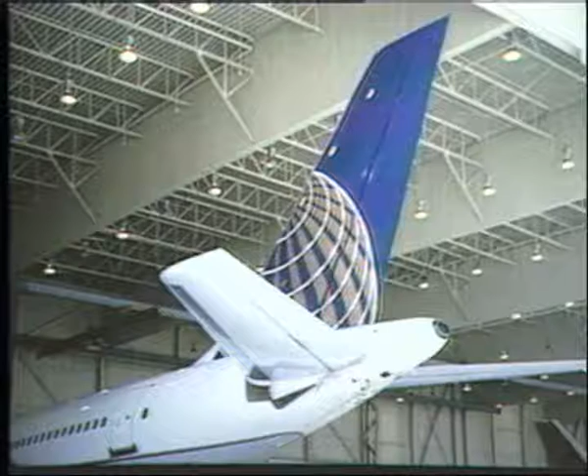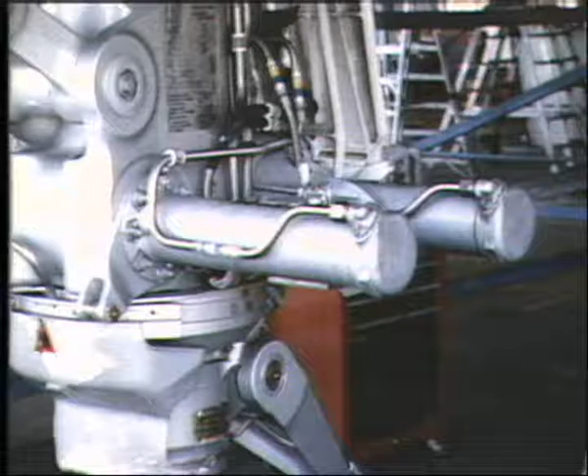When you think of hydraulic system maintenance, what's the first thing that comes to mind? Most likely it's replacing filters, servicing reservoirs, or changing components. Well, the hydraulic system's pieces and parts that need the most attention aren't components and filters. They're lines, B-nuts, O-rings, and seals.

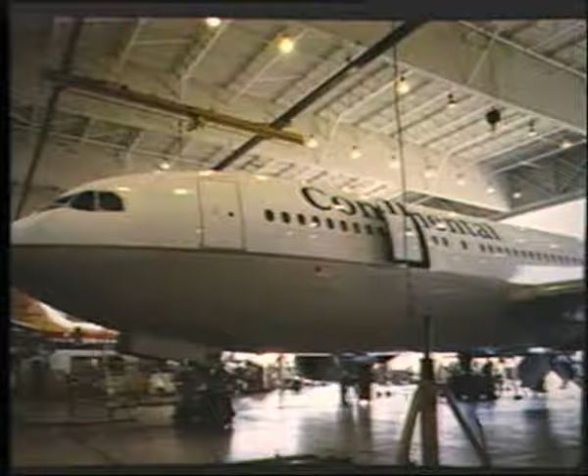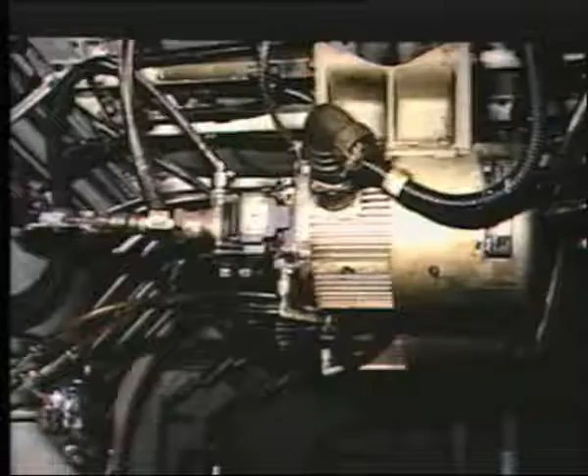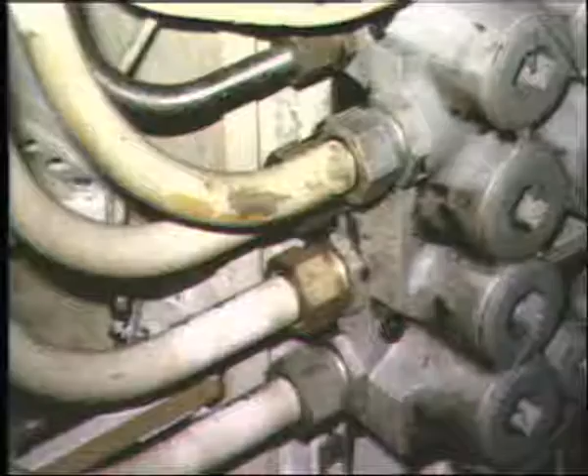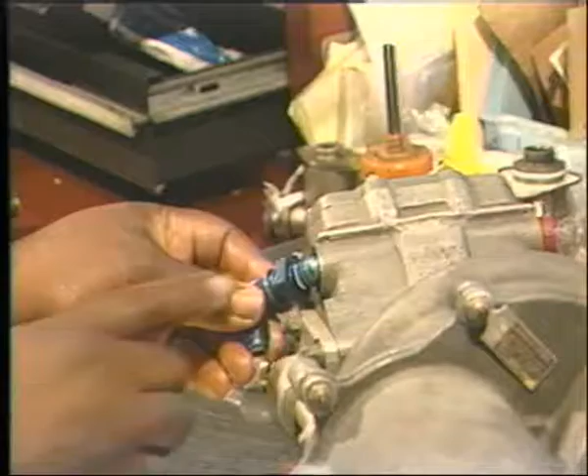The remaining 48 problems are because of leaking hydraulic tubes, B-nuts, O-ring packings, and other types of seals. That means that 48 of every 100 hydraulic system problems are caused by a simple plumbing failure. However, these problems cause the greatest number of flight delays and cancellations.

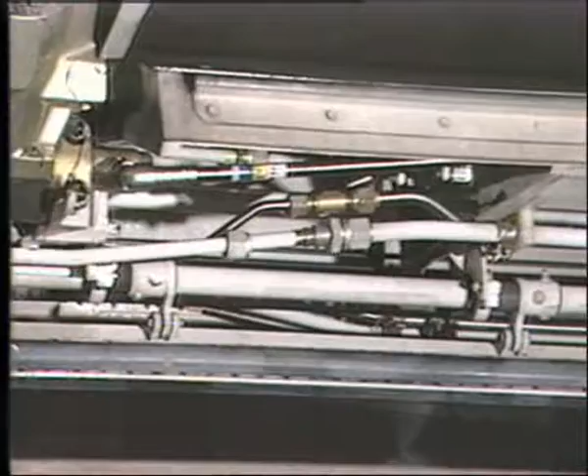These simple plumbing problems can also be real hard to fix if you don't know the basic hydraulic plumbing rules. If you don't work carefully and follow these rules, your work may be the cause of the next hydraulic leak that delays or cancels a flight. Let's look at these basic hydraulic plumbing rules.

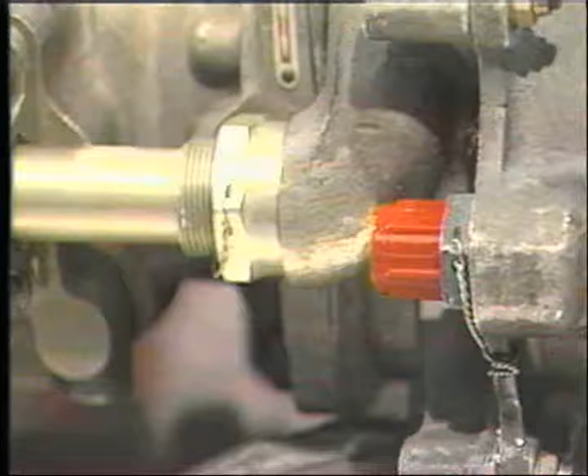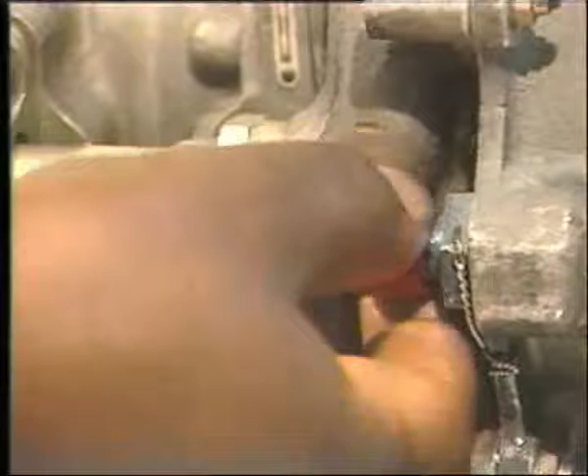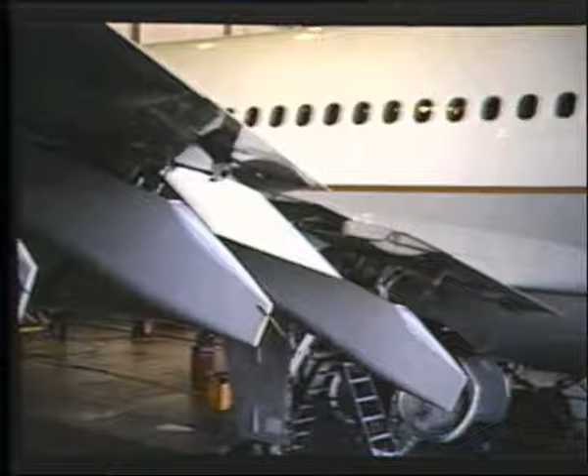Always work clean and cap open lines. Contamination that gets into a system or collects on sealing surfaces can cause leaks, internal and external. Hydraulic fluid itself is a contaminant. It can eat paint and decals. When hydraulic fluid is allowed to penetrate a composite structure, it will attack the core material and reduce it to mush. Once a composite assembly has been attacked, its structural integrity will be lost.

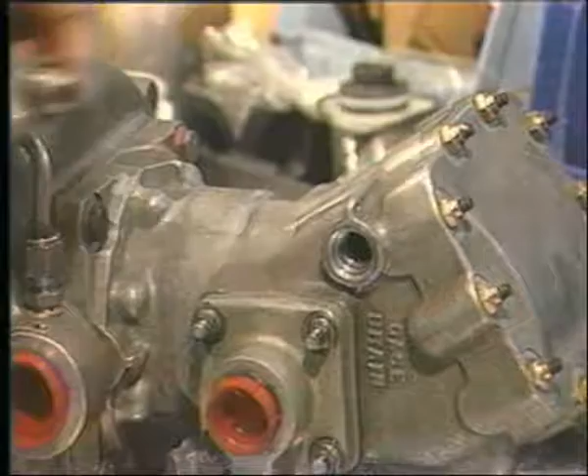To avoid damage caused by twisting, tearing, and chipping, always lubricate O-ring packings, seals, backup rings, and fitting threads with hydraulic fluid before assembly. When assembling hydraulic system fittings, be sure that seals and backup rings are properly positioned before torquing the connection.

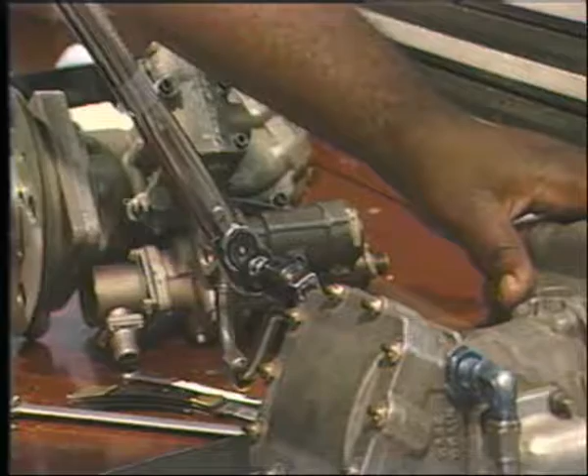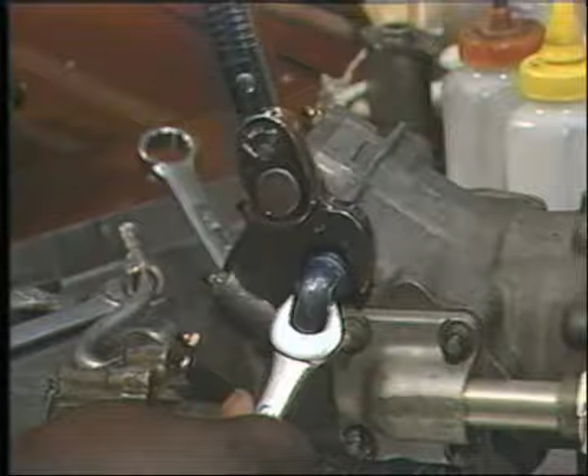When installing an elbow fitting into a component, be sure that all the threads are completely screwed into the boss. This is to make sure that the O-ring packing rides in the undercut and not on the threads. To prevent an elbow fitting from turning while its lock nut is being torqued, hold it with a second wrench. To make a stress-free installation, be sure that all elbow-to-pipe connections are correctly aligned before torquing the B-nuts.

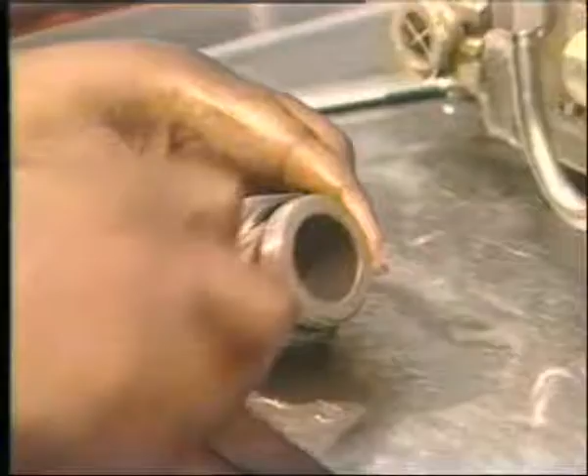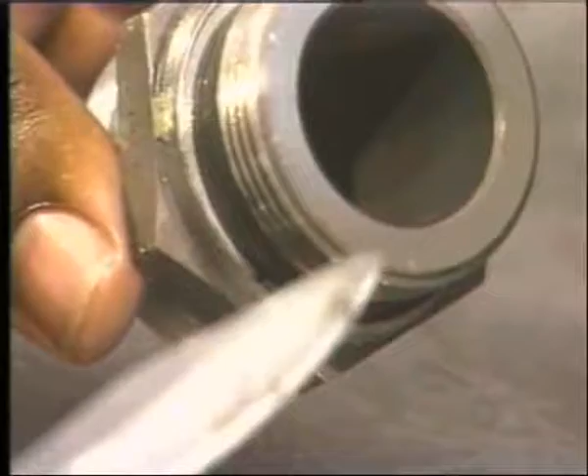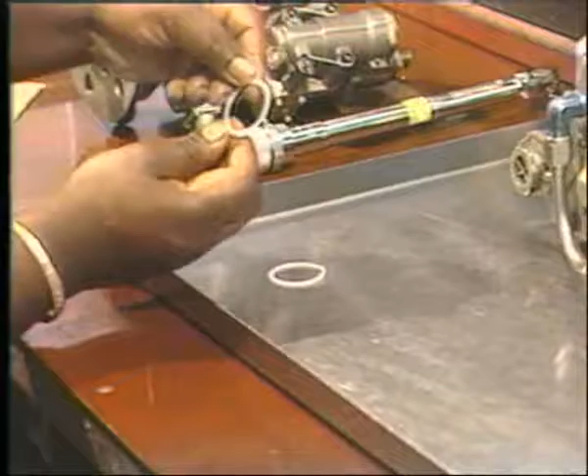Do not use pointed, sharp-edged, or steel tools to remove or install O-ring packing, backup rings, and seals. Damage may occur. Never reinstall used O-ring packings or seals. Once they've been compressed, they will never regain their original shape again. It's okay to reinstall backup rings and washers again if you are sure that they have not been damaged. Remember this: if you have any doubt, always install new ones.

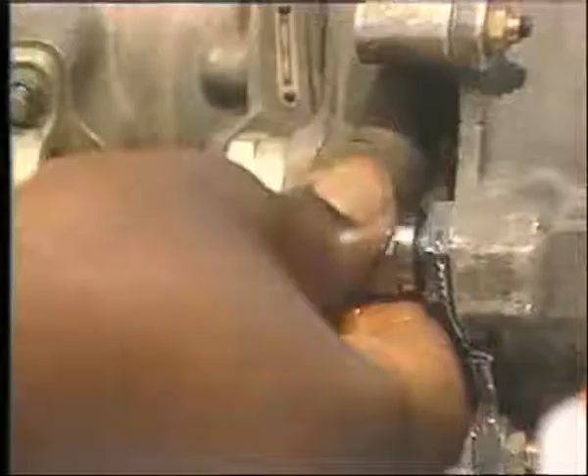Before torquing a B-nut, be sure that the tube fits squarely into the fitting. Never force or bend a tube to make it fit. Metal tubes don't stretch. If a piece seems shorter upon reinstallation or after a component change, something is wrong. Stop, think, and investigate the problem before you proceed.

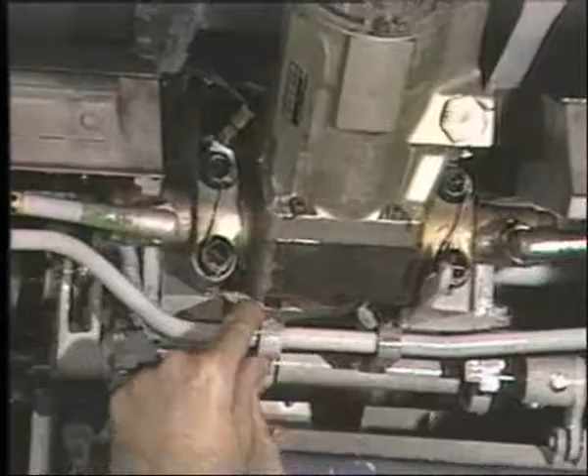Make sure that tubes are not forced into clamps or line blocks. A stressed installation will lead to a cracked tube at the nearest fitting or B-nut, and you can bet it won't be long before it happens. If clamps or line blocks are removed so a tube or component can be replaced, be sure that they are reinstalled again. Tubes that are not properly supported will vibrate. Vibration is the greatest enemy of a hydraulic system. It causes tubes to crack and connections at fittings to loosen up and leak.

When repairs are finished, always bleed the system and leak check your work. We, the mechanics, have control of torquing. The lack of proper torquing is the single greatest cause of leaks. Those calibrated elbows are notorious for being out of calibration. Use a torque wrench. All right, that's the basic rules. They can keep you out of trouble.

Airbus has a booklet available called Hydraulic Systems Working Practices. It contains information from the Airbus Maintenance Manual that will help you maintain leak-free hydraulic systems in your aircraft. The subjects covered are simplified schematics, general tips to prevent leaks, pipe connection torque values, and precautions to avoid line chafing.

Let's take a closer look. We'll start with torquing. As we've said, when it comes to preventing hydraulic leaks, proper torquing is important. You simply can't get the correct torque without using a torque wrench. If, by chance, you get the correct torque without a torque wrench, you just got lucky, and luck has no part in our business.

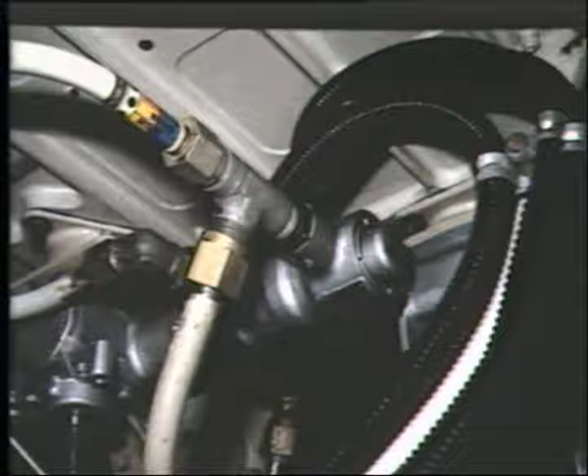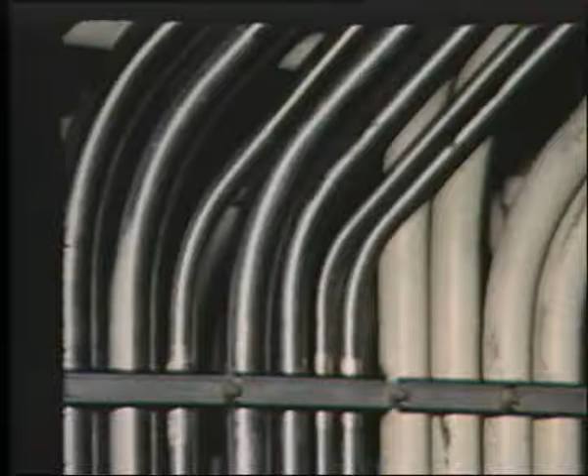Every time you torque a B-nut, union, or fitting, the first thing you must ask yourself is, what kind of material is this tube made from, and what's its diameter? The material is usually steel or aluminum. When the material is steel, it will either be thin-walled stainless, it's called CRES, or titanium. Aluminum is also called light alloy.

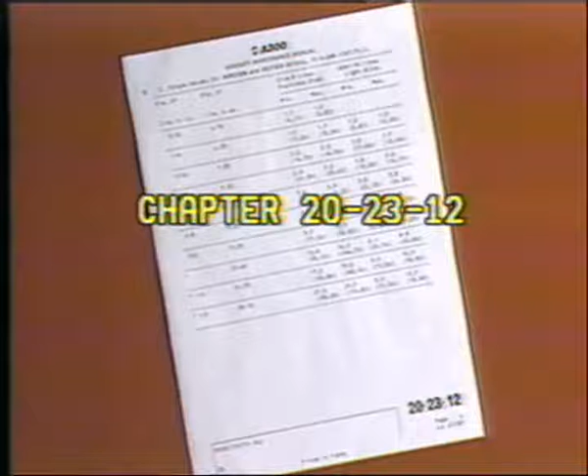With this information, the correct torque is at your fingertips. Look it up in the maintenance manual. You will always find it in Chapter 20, Section 23, Subsection 12. The tables or charts are laid out according to the pipe diameter and the type of material used to manufacture the pipe.

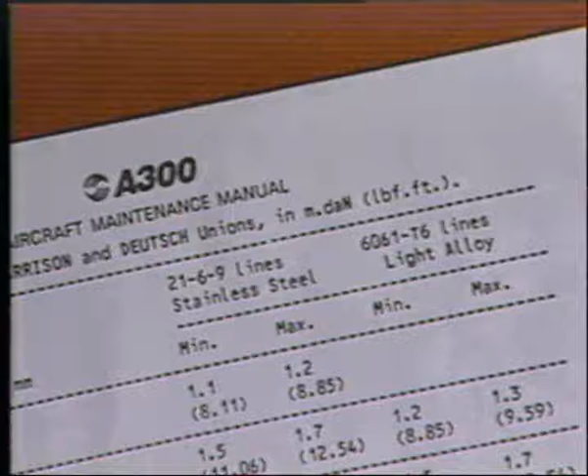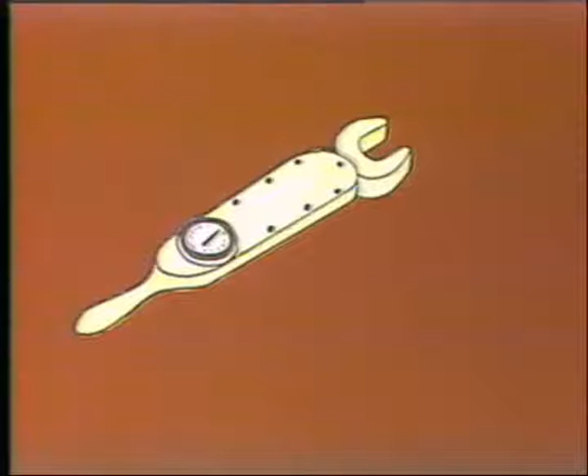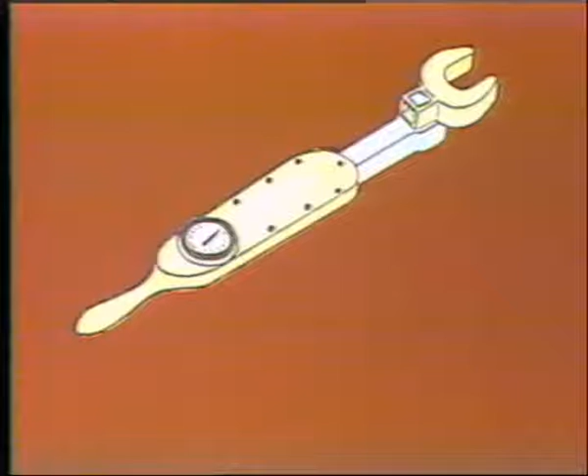Okay, you've got the right torque value. Back at the airplane, you discover that you can't reach the B-nut with just a torque wrench and crow's foot. You need an extension. When you add the extension, the lever length changes. That's the distance between the center of the handle and the center of the crow's foot. That means your torque value must also change because of the increased leverage.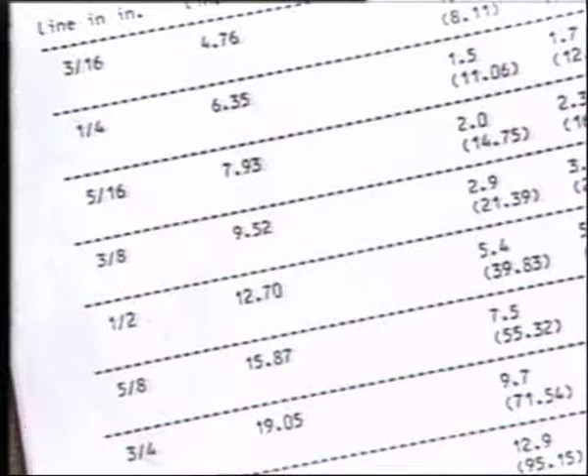Do you remember the formula T2 equals T1 times A over A plus B? With it, you can compute the new torque. Let's do an example problem using the formula. Our tubing diameter is 9.52 millimeters, and it's made from aluminum, light alloy. The chart states that the torque range is 1.8 to 2.0. If we were working in pounds rather than metrics, we would use the numbers in parentheses.

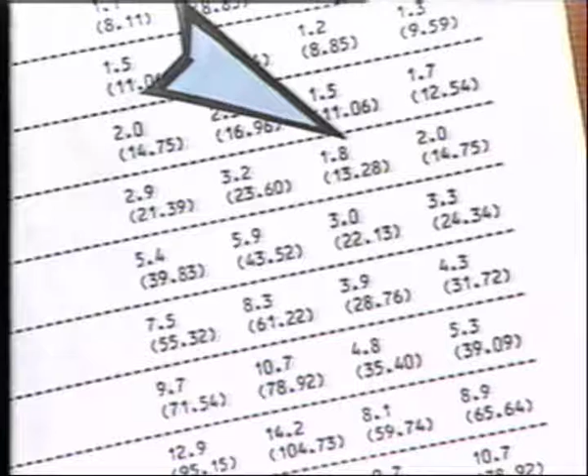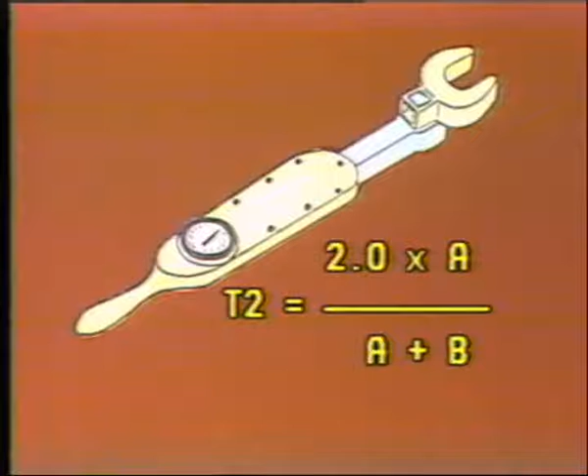Okay, T1 is the required torque at the union. It's 2.0, which is the upper limit of our acceptable torque range. A is the lever length of the torque wrench. It's 300 millimeters. B is the lever length of the extension. It's 100 millimeters.

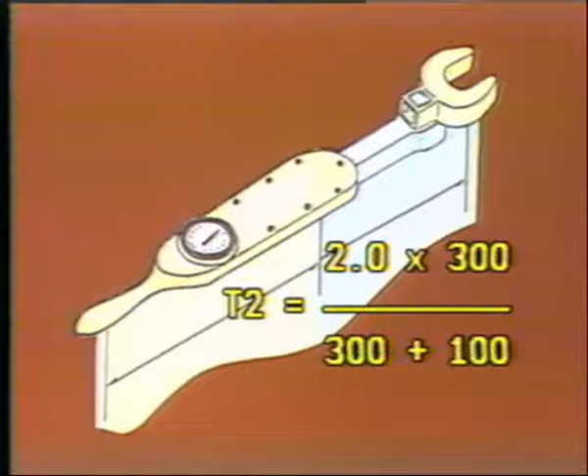Now it's only simple math. 2.0 times 300 millimeters equals 600. 300 millimeters plus 100 millimeters equals 400. 600 divided by 400 equals 1.5. So, T2, torque reading at the wrench dial, equals 1.5, our new value.

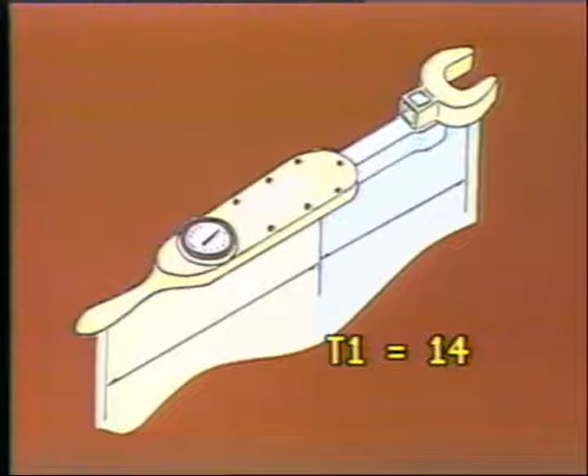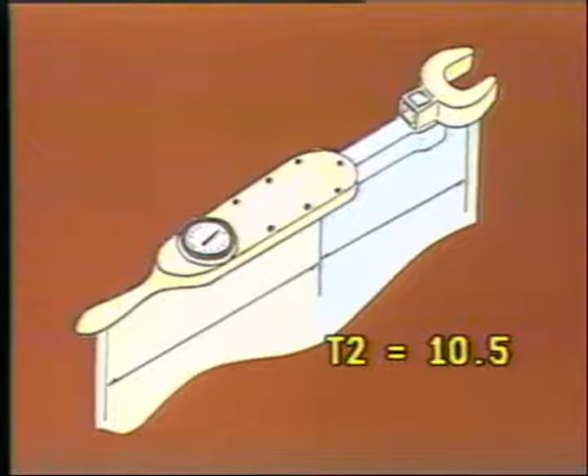Let's say you were working with a torque wrench that reads in inch-pounds of torque. Then, if T1 equals 14 foot-pounds of torque, T2 will equal 10.5 foot-pounds. One more math step is required to convert the 10.5 foot-pound reading into an inch-pound reading. Multiply 10.5 times 12 inches. The new reading will be 126 inch-pounds.

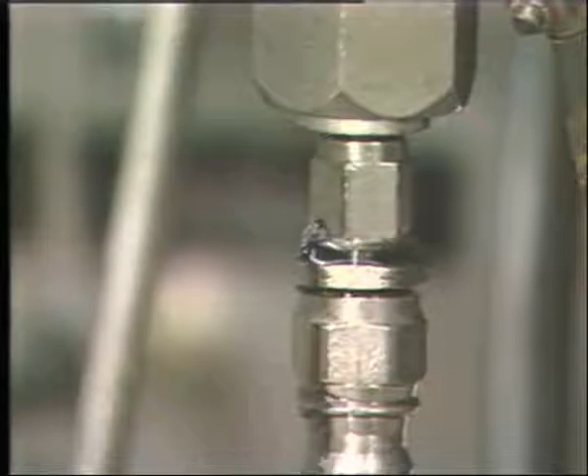If you don't use a torque wrench, one of two things will happen. If the tubing is steel, the B-nut will be under-torqued. If the tubing is aluminum, it will be over-torqued. Studies by the manufacturers and the airlines have proven this to be true. Under-torqued steel leaks, but over-torqued aluminum cracks, compresses, and fails. Look the torque up in the Airbus maintenance manual. It's the only way a professional works.

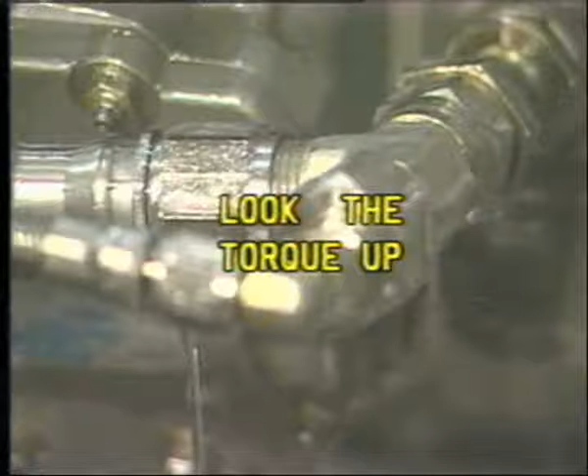The Hydraulic Systems Working Practices booklet also has information in it about torquing hydraulic tubes and torque values. Remember, this booklet is only a quick reference guide and is not regularly updated. The Airbus Maintenance Manual is always the final reference document. If a B-nut or a connection at a component is found to be leaking, it must be disconnected and inspected for damage. The tube may be cracked or worn because of vibration.

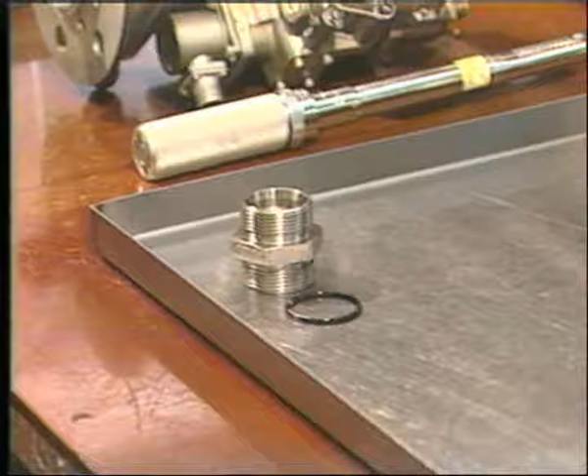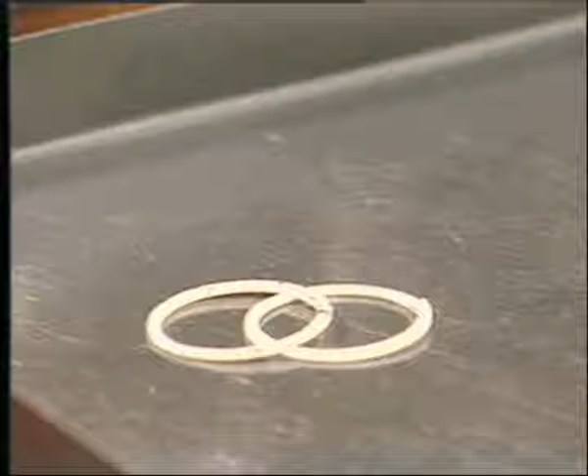Whenever a connection with an O-ring packing is disconnected, always replace it. O-rings compress and harden with age. If you should ever come across a leather backup ring, be sure you replace it with an equivalent one made of Teflon. If a tool is necessary to remove or install a seal, use one made of brass or a similar material. Remember, hard, sharp-edged tools can damage seals and sealing surfaces.

Alignment of hydraulic tubes. You'd think that was automatic. When an airplane is designed, the component positions are determined and the tubing is formed to make all the connections. Unfortunately, tubing cannot always be formed to make a connection. The turn may be too tight, or structure may be in the way. When this happens, an elbow fitting must be installed, and we are responsible for its alignment.

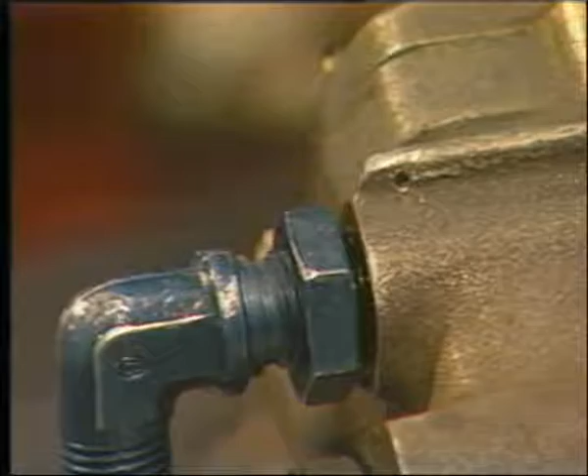You can find elbows on components, at bulkheads, and in other tight locations. When installing an elbow, be sure you screw it in until it's at the proper depth. If it makes a connection between a tube and a component, remember, the O-ring must ride in the undercut designed for that purpose. Once you have gotten the proper depth, turn the elbow until it aligns with the tube. Now tighten the B-nut with your fingers.

Hold the elbow with a wrench and torque the lock nut. After that, check the alignment with the tube by turning the B-nut with your fingers. If it doesn't bind, you've got it right. Now torque the B-nut, and you'll have a properly torqued, stress-free connection.

Stress. To create a stress-free tubing installation, there are 4 steps. Position the tube with the clamps loose. This allows the tube and the fitting to align with each other. Align the tube and the fitting by hand, and bottom the tube in the fitting. Remember to smear the threads with hydraulic fluid.

Hold the tube in alignment and tighten the B-nut by hand until it contacts the sleeve shoulder. If you can't screw the B-nut down by hand, it's not properly aligned. Now, torque the B-nut to the proper torque as shown in Chapter 20 of the Airbus Maintenance Manual. Remember to hold the union with a wrench while you torque the B-nut.

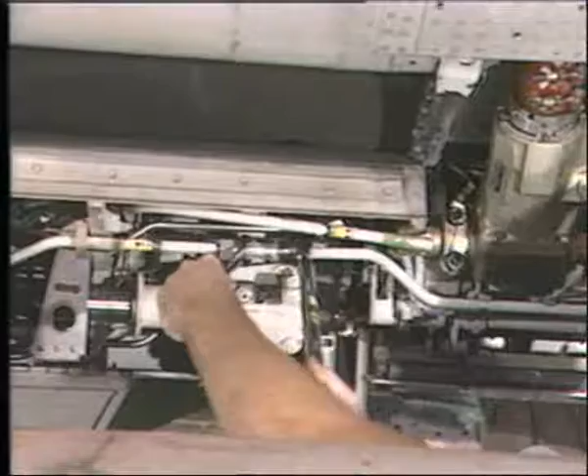One last thought about stress. If a B-nut is used to stretch the tubing, the connection will not be stress-free. Now we know that tubing can't really stretch, so the stress will most likely cause a leak or a blowout.

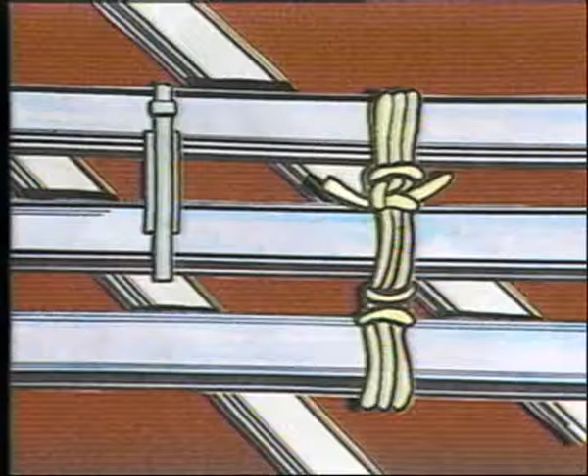Always be on the lookout for the risk of chafing. If it looks like a hydraulic tube could come into contact with structure or another hydraulic tube, use nylon ties and flexible blocks and tie straps to hold the tubing in its correct position. Be careful and don't add stress to the hydraulic tube that's being tied down.

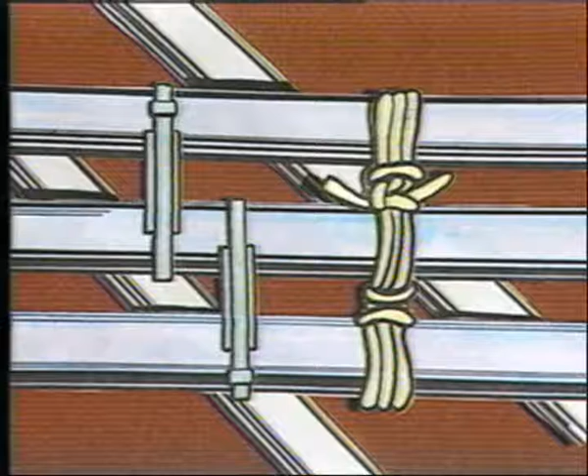Chapter 20, Section 23, Subsection 14 of the Airbus Maintenance Manual explains the correct way to use nylon ties, flexible blocks, and tie wrap straps. Their use is also covered in the Hydraulic Systems Working Practices booklet in Section 4, Precautions to Avoid Line Chafing.

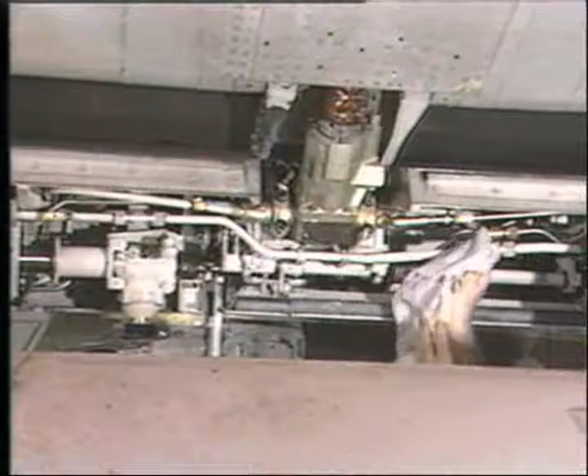After working on a hydraulic system, the reconnected tubes and fittings must be leak checked. Before actually doing the check, the work area must be clean and dry. If you find a leak, depressurize the system. Disconnect the tube and inspect the connection for damage. After the inspection is completed, torque the connection to the correct torque value.

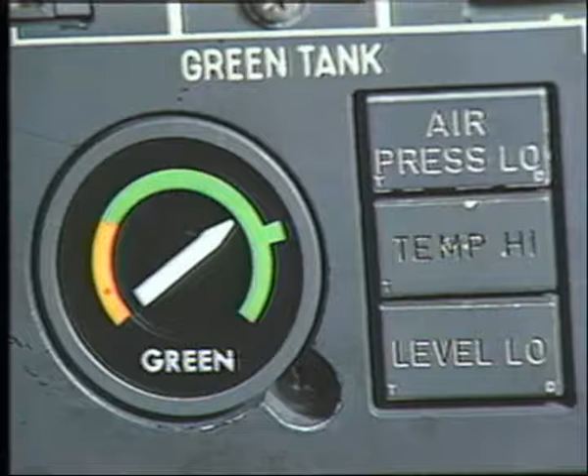When the work is finished, the system must be bled. Any time a tube is disconnected, fluid is lost and air replaces it. A300 hydraulic systems are a closed-loop design. The fluid leaves the reservoir, carries the hydraulic energy to the components that do the work, and then returns to the reservoir. The system, through normal operation, will bleed itself. The only components on the aircraft that will not self-bleed are the brakes.

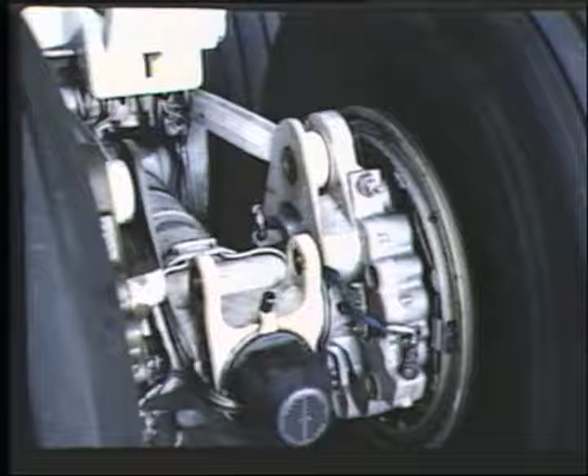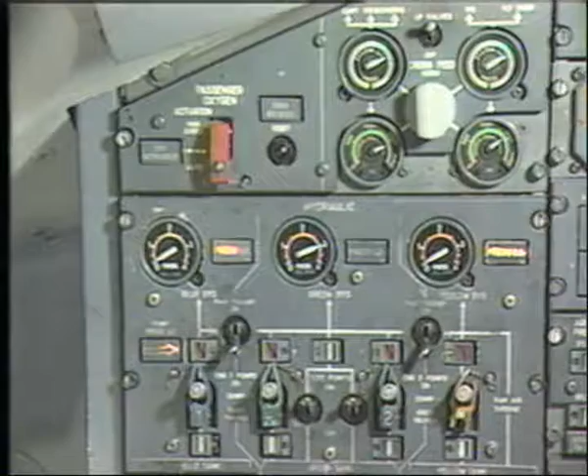Good maintenance practices tell us to accelerate the bleeding process and remove any trapped air before the airplane flies. To complete the process, you power up the system's pumps, electric or engine-driven, and operate that part of the system that was worked on. The trapped air will move to the reservoir and be vented overboard. Be sure to check the reservoir fluid level after the hydraulic system is bled. It may need to be serviced.

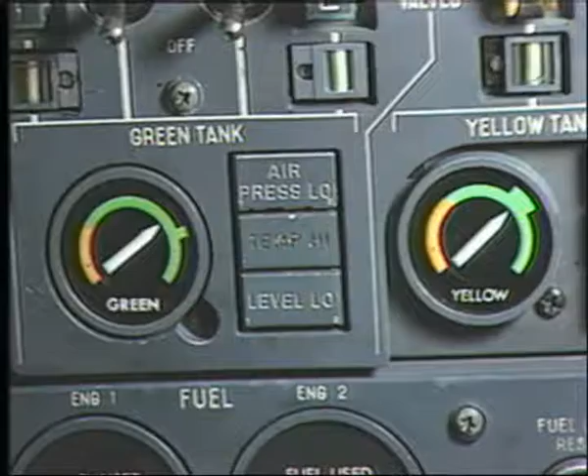All right, that's it. But I want to say one more time that it's important to use a torque wrench and to look up the correct torque value in Chapter 20 of the Airbus Maintenance Manual. Work smart. Be smart. You're a professional.